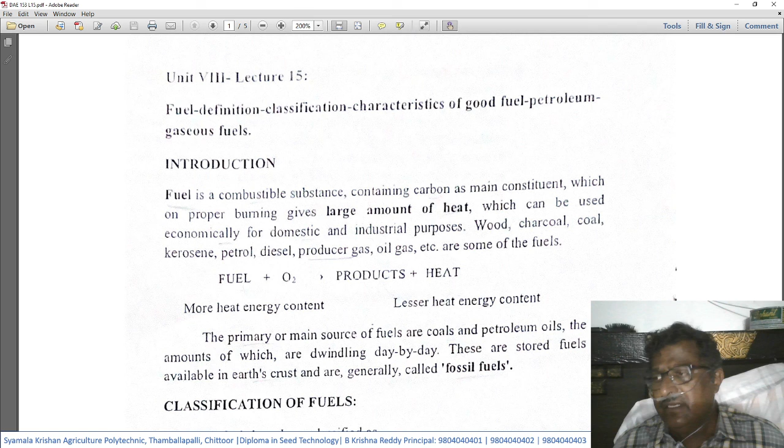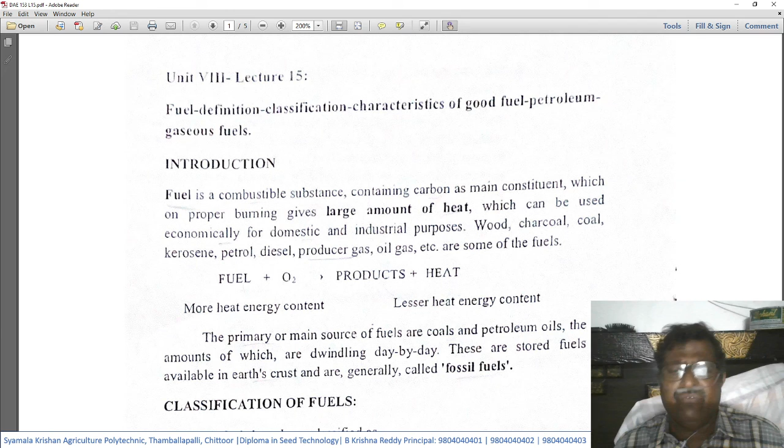These are called fossil fuels. Why? Because the plant or animal dead bodies which are buried deep in the earth's surface thousands of years back, subjected to very high pressure and temperatures, become fossilized, and out of that, because of the anaerobic reactions that happened underneath the earth, they got converted into fuels, either coal or petroleum products. So that is why these are called fossil fuels.

Classification of fuels: The fossil fuels have been classified as natural or primary fuels which are found in nature, such as wood, peat, coal, petroleum, natural gas, etc. In the natural or primary fuels which are found in nature, there is wood. This is everybody's knowledge—the wood which we get from trees after drying will be used as fuel wood. So wood is also a type of fuel.

Then peat. Peat is a low quality coal-like material which is brown in color and available in certain parts of our country, especially in the northeast states, in the form of bogs or peatlands, where it will be excavated. It is something like earth material which is brown in color. It will be dried and used as fuel. These lands from where this peat is collected are called peatlands or peat bogs.

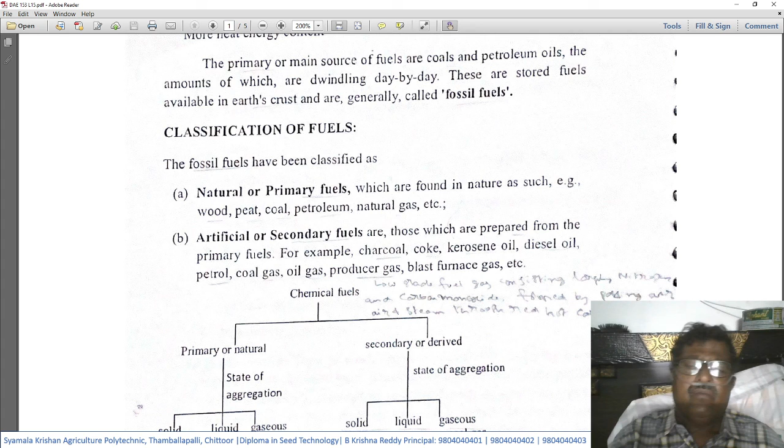Then the classification of various fuels is given in chart form. Students need to go through it and study it well. First, fuels. Out of fuels, chemical based fuels can be called chemical fuels. In that, primary or natural fuels, and secondary or derived fuels, which can also be called artificial fuels. Let's see the different types of aggregations.

Under primary or natural fuels, solid forms: examples are wood, peat, lignite, coal, and dung. These are the solid forms of natural fuels. Then liquid form, it is crude oil. Gaseous form, natural gases.

Then secondary or derived or artificial fuels are also in three forms: solid, liquid, or gaseous. Examples of solid forms are coke, charcoal, petroleum coal, and briquette. Liquid forms are kerosene, diesel, petrol, synthetic gasoline, and LPG, that is liquid petroleum gas. Gaseous forms are coal gas, water gas.

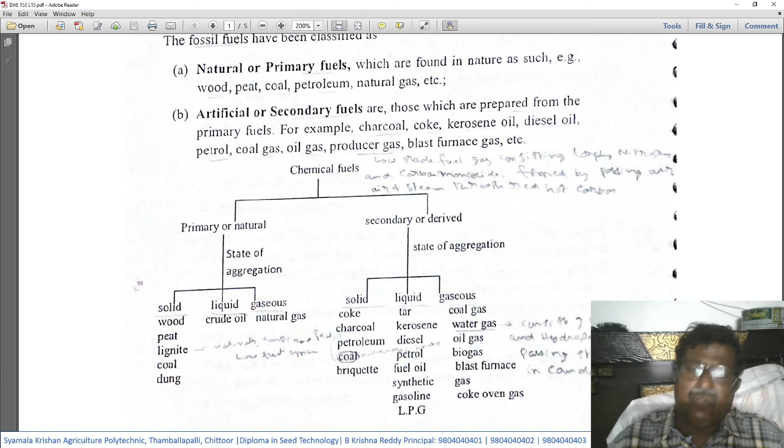Then calorific value. Calorific value of a fuel is the total quantity of heat liberated when a unit mass or volume of the fuel is burned completely. Calorific value means it is the quantity of heat that is liberated when a unit mass or volume of a fuel is burned completely.

Unit of heat, that is calorie, is the amount of heat required to raise the temperature of 1 gram of water through 1 degree centigrade.

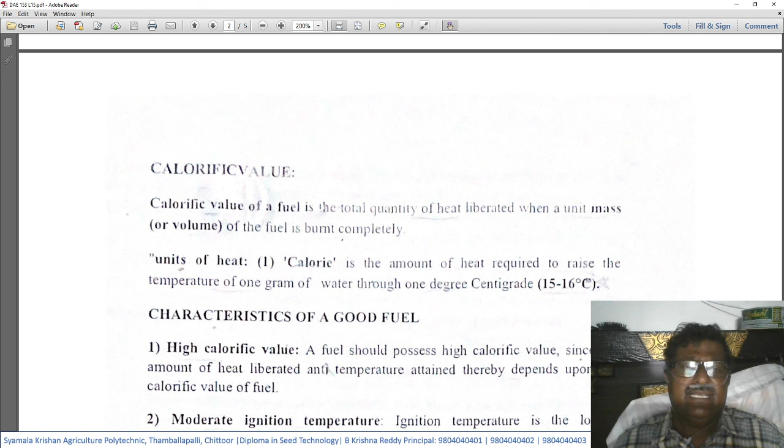So it is important to note down and remember what is the calorific value of a fuel, and what is the definition of a calorie also.

Then characteristics of a good fuel. So to be a good quality fuel, what are the basic characters that need to be present in that fuel?

Number one is high calorific value. A fuel should possess high calorific value since the amount of heat liberated and the temperature attained thereby depends upon the calorific value of the fuel. That means unless the given fuel has high calorific value, we will not get the required high temperatures or liberate a higher amount of heat when a given quantity of the fuel is burned. So naturally it is desirable to have a fuel with higher calorific value than a low calorific value. If the calorific value is less, then to get a given quantity of heat or to raise to a certain temperature, we need to burn more quantity of such fuel material. So if it has high calorific value, for the same heat or temperature, we need to burn only less quantity. So the desirable character here is that the fuel should have high calorific value.

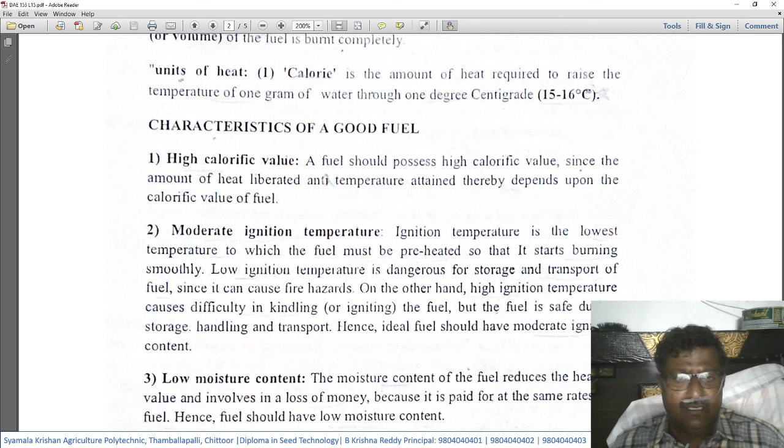Then the second desirable character is moderate ignition temperature.

So what is ignition temperature? It is the lowest temperature to which the fuel must be preheated so that it starts burning smoothly. It is something like an ignition point, the low temperature at which the fuel starts igniting.

Low ignition temperature is dangerous for storage and transportation of the fuel since it can cause fire hazards. If the fuel has a low ignition point, say 20 or 25 degrees, when such fuels are stored or transported, there is a chance they get subjected to such temperatures which automatically ignites the fuel and may lead to fire accidents. So a good quality fuel should not have low ignition temperature.

On the other hand, if such fuels have high ignition temperature, what does it mean? To just start ignition or burning, we need very high temperatures, which is once again a disadvantage because to ignite or burn the fuel we need to use a lot of temperature and heat, which is once again a loss.

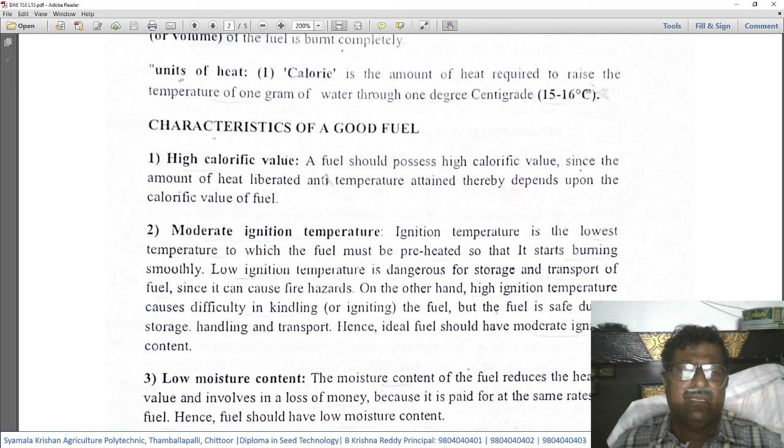So the ideal fuel is one which has neither too low nor too high ignition temperature. Therefore, it should have a moderate ignition temperature.

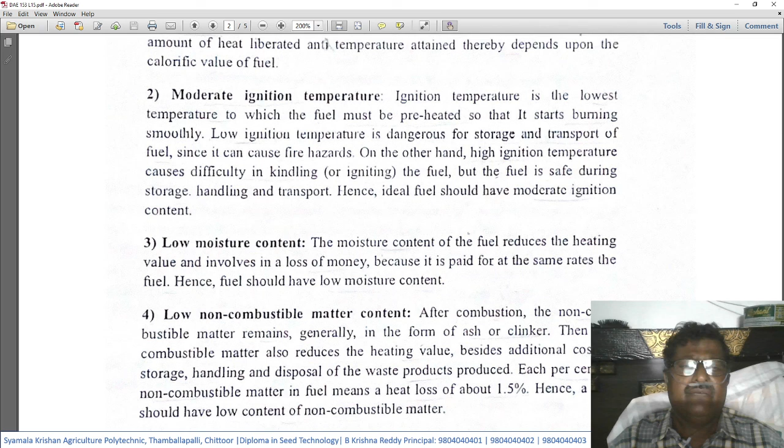Then coming to the third desirable property of any fuel: low moisture content. The moisture content of the fuel reduces the heating value and involves a loss of money because it is paid for at the same rate as the fuel. Hence, the fuel should have a low moisture content.

Imagine a fuel having high moisture. Since a fuel is purchased either on weight basis or volume basis, when moisture is present in the fuel, it naturally adds to the weight, which means we are purchasing the moisture also at the rate of the fuel, which is financially not a good proposal. In other words, even to lose that moisture, a lot of heat is needed, which is once again a loss. So as far as possible, the fuel should have low moisture content.

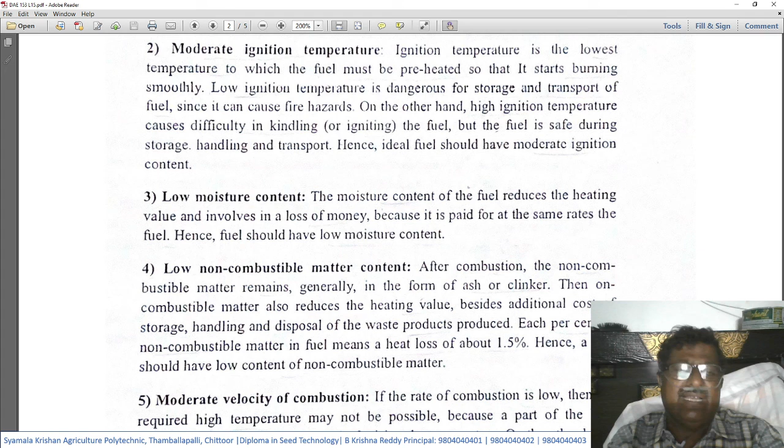Then the fourth property: low non-combustible matter content. Like water content, there may be other components in the fuel that are non-combustible in nature. If such non-combustible materials are present, one needs to waste a lot of heat to eliminate them, in addition to purchasing these unwanted materials at the cost of the fuel.

Then, moderate velocity of combustion. If the rate of combustion is low, the required high temperatures may not be possible because part of the heat liberated may get radiated instead of raising the temperature. On the other hand, too high combustion rates are also not required. What is combustion velocity?

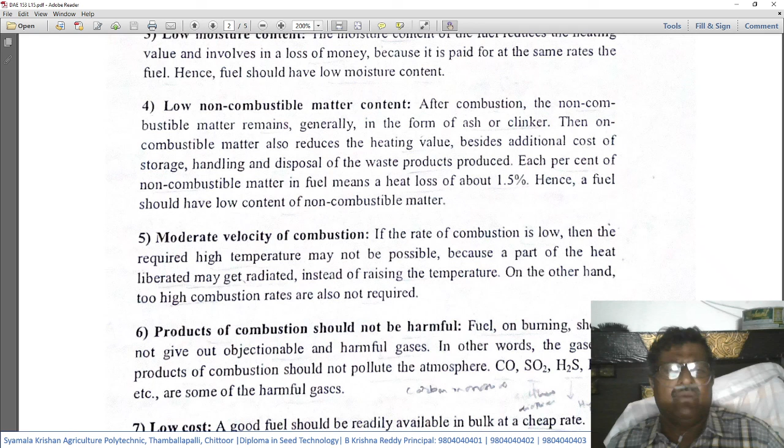Combustion velocity is the speed with which the fuel completely burns out and releases maximum possible heat. If it is very low, the required high temperatures cannot be achieved by combusting such materials. Otherwise, if the velocity of combustion is too high, we get the heat or temperature over a very short period, which may not be desirable for the required purposes in industries. So a good fuel should have moderate velocity of combustion.

Then the sixth property: products of combustion should not be harmful. After burning the fuel, there would be some substances left over. Fuel on burning should not give out objectionable or harmful gases or substances. In other words, the gaseous products of combustion should not pollute the atmosphere.

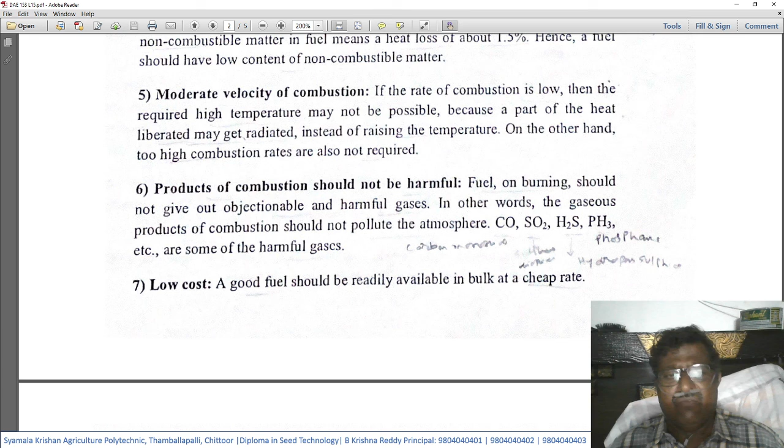As we know, whenever fuel materials are burned in the atmosphere, certain gases like carbon dioxide, carbon monoxide, sulfur dioxide, hydrogen sulfide, and phosphine are produced. Out of these, carbon monoxide, sulfur dioxide, hydrogen sulfide, and phosphine are very harmful for animals and men. So, as far as possible, the given fuel should not produce this type of harmful gases when combusted or burned.

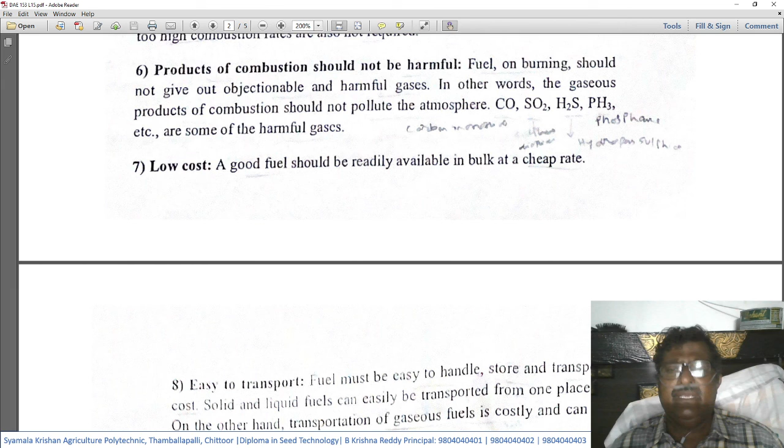Then, low cost. A good fuel should be readily available in bulk at a cheap rate. It's common sense: nobody wants to purchase fuel at a higher cost since it may not be viable for domestic or industrial purposes. So an ideal fuel should be cheap and at the same time available in abundance. If it is cheap but not available, there will be no use. So cost-wise it should be low and availability should also be there.

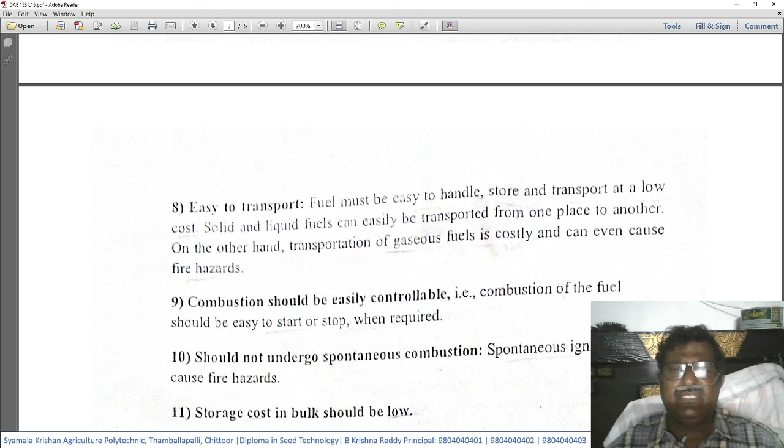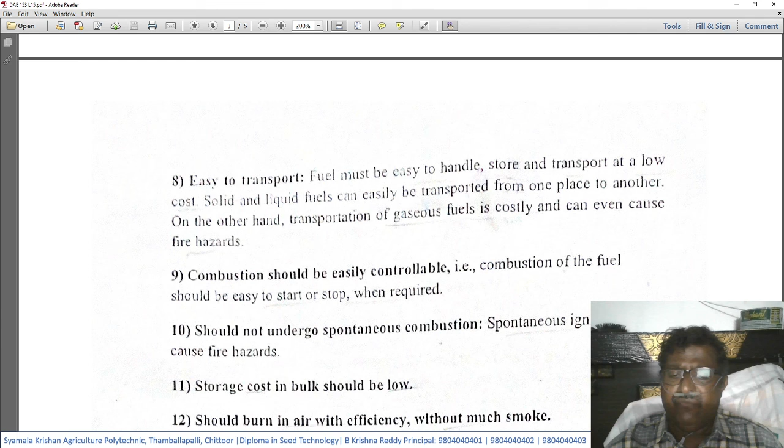Eighth point, easy to transport. Fuel must be easy to handle, store and transport at a low cost. Solid and liquid fuels can easily be transported from one place to another. On the other hand, transportation of gaseous fuel is costly and can even cause fire hazards.

Combustion should be easily controllable. That is, combustion of the fuel should be easy to start or stop when required. We should have control over the combustion of the fuel. Whenever we want to start, we must be in a position to start the burning process, or when it needs to be stopped, we must be able to stop it. That type of fuel should be used.

Next, tenth point, should not undergo spontaneous combustion. Spontaneous ignition can cause fire hazard. So the fuel that needs to be used should not undergo spontaneous combustion. That is, it should not automatically catch fire. Only when we need to combust or burn it should it start burning. It itself should not start burning.

Eleventh point, storage cost in bulk should be low. That is, storage should be low. This is from the economic point of view.

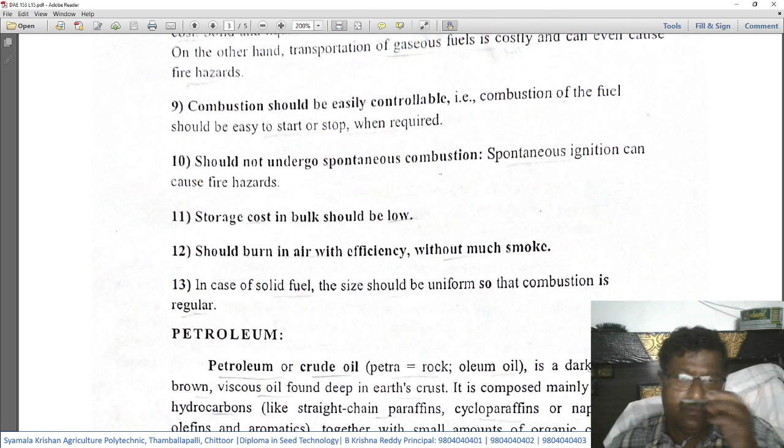Twelfth point, should burn in air with efficiency without much smoke. An ideal fuel is one which should burn efficiently and without producing much smoke, because if it produces more smoke, it results in pollution.

Thirteenth and last point, in case of solid fuels, the size should be uniform so that combustion is regular. The size of the units of fuel, say coal, coke, peat, or even wood, should be uniform so that while burning you get uniform combustion or heat. If it is of various sizes, then it is difficult to get uniform combustion.

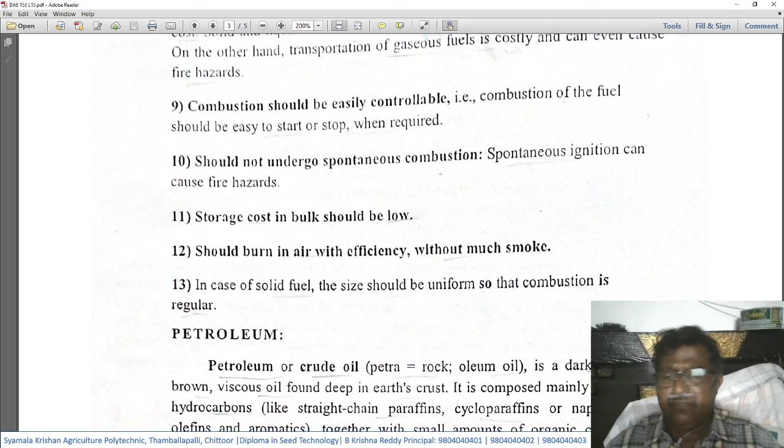So then we will see what is petroleum. Petroleum or crude oil, otherwise known as crude oil. Here petro means rock, oleum means oil. That means it is produced from a hard rocky substance beneath the earth's surface. It is dark greenish brown in color, a viscous oil found deep in the earth's crust.

That means it originated in the deeper layers of the earth's crust. As we already told, it is originated from fossil rocks. Fossils are the plant and animal materials which were buried deep in the earth some millions of years ago. When they are subjected to high pressures and high temperatures, they become fossil rocks or fossils. From that, this crude oil or petroleum is extracted.

It is composed mainly of various hydrocarbons. This type of crude oil contains a lot of hydrocarbons like straight chain paraffins, cycloparaffins or naphthalenes, olefins, and aromatics. These are the various substances present in various proportions in the petroleum, together with small amounts of organic compounds containing oxygen, nitrogen and sulfur.

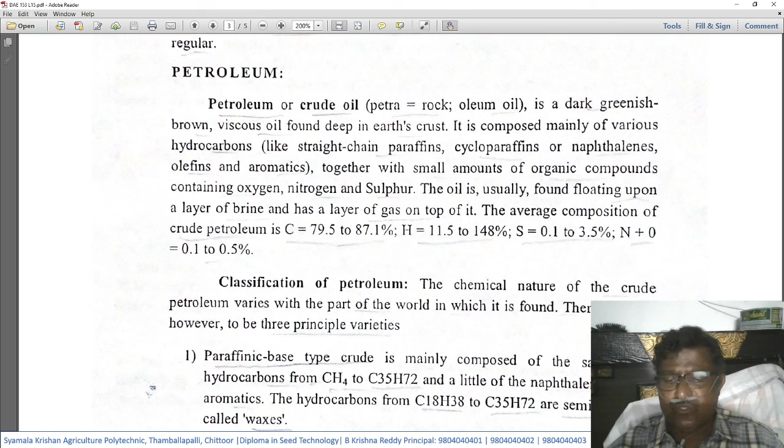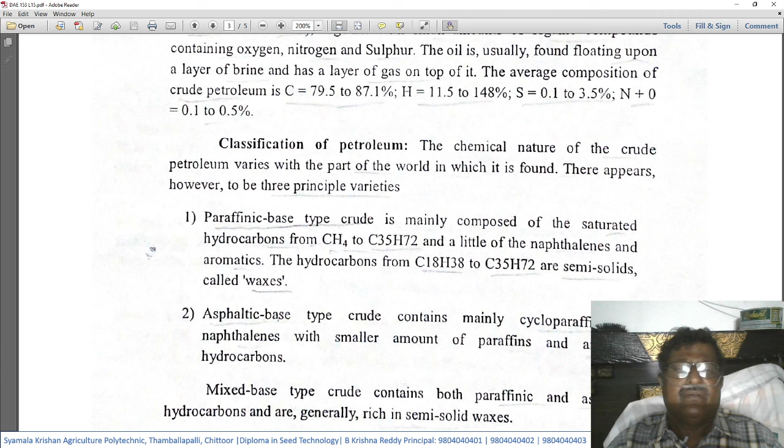Then, classification of petroleum. The chemical nature of crude petroleum varies with the part of the world in which it is found. There appear, however, to be three principal varieties. So this petroleum and its components vary from place to place. There are three principal varieties of petroleum.

One is paraffin-based type. Crude is mainly composed of saturated hydrocarbons from CH4 to C35 H72. These are the chemical formulas for the substances present in the crude oil, meaning in the given petroleum, one atom of carbon and four atoms of hydrogen up to C35 H72. This is the range of substances present here, with a little of the naphthalenes and aromatics. The hydrocarbons from C18 H38 to C35 H72 are semi-solids, and when the hydrocarbons have this type of formula, they are called waxes.

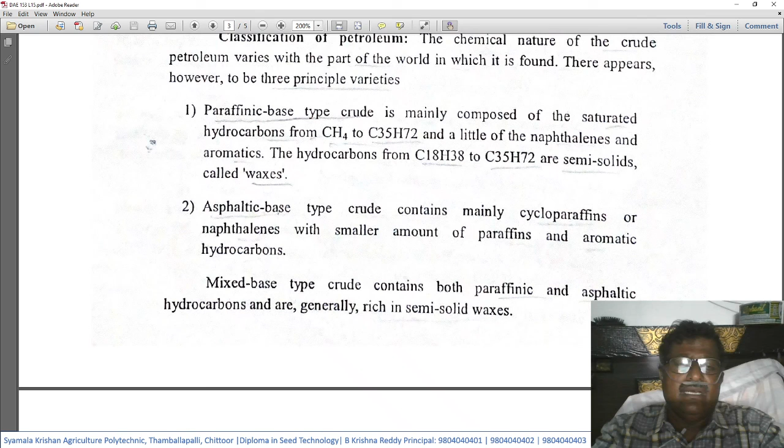Asphaltic base type crude contains mainly cycloparaffins or naphthalenes with a smaller amount of paraffins and aromatic hydrocarbons. Mixed base type crude contains both paraffinic and asphaltic hydrocarbons and is generally rich in semi-solid waxes.

According to modern theory, petroleum has resulted from the partial decomposition of marine animal and vegetable organisms of prehistoric forests. As we already discussed, the plant parts and animal parts got decomposed after getting buried deep in the earth at deeper layers.

These were present in the prehistoric forest - various vegetative matters, plants, and various types of marine and land animals. When they are buried deep in the deeper layers of the earth and are subjected to anaerobic reactions under great pressure and temperatures, they got converted into fossil fuels. Out of them, only these petroleum products are originated.

Changes in the earth like volcanoes etc. buried these materials underground where they have been subjected to intense pressure and heat during the ages of time. This is what we explained up to now.

The conversion of these materials into various hydrocarbons has been going on either under the influence of radioactive substances like uranium, or by bacterial decomposition under anaerobic and strongly reducing conditions and temperatures under high pressures. I think everything here we have discussed.

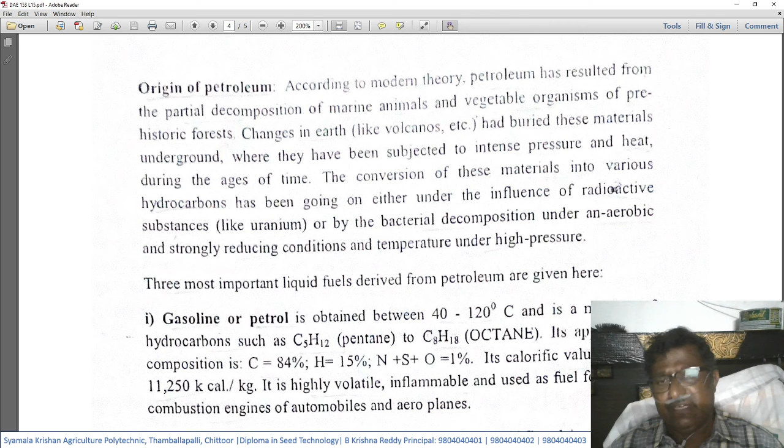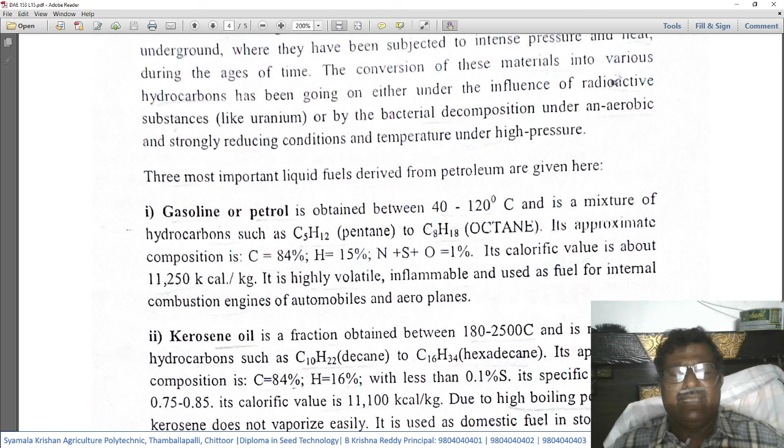Out of this petroleum raw material, three types of petroleum products are derived. Number one, gasoline or petrol. From the petroleum, either gasoline or petrol is obtained between 40 to 120 degrees centigrade.

When the petroleum raw material is refined, subjecting it to various degrees of temperature, that is something like a fractional distillation, various fractions of the petroleum raw material will get separated and they will get collected and named differently, and used for different purposes.

In the refinery or distillation process, petrol or gasoline is the product which we can obtain between 40 to 120 degrees centigrade, and is a mixture of hydrocarbons such as C5H12, that is pentane, to C8H18, that is octane. So this petrol or gasoline is a mixture of various hydrocarbons, starting from pentane C5H12 to octane C8H18.

Its approximate composition: this petrol or gasoline contains 84% carbon, 15% hydrogen, and nitrogen, sulfur and oxygen all put together around 1%. These are the approximate values.

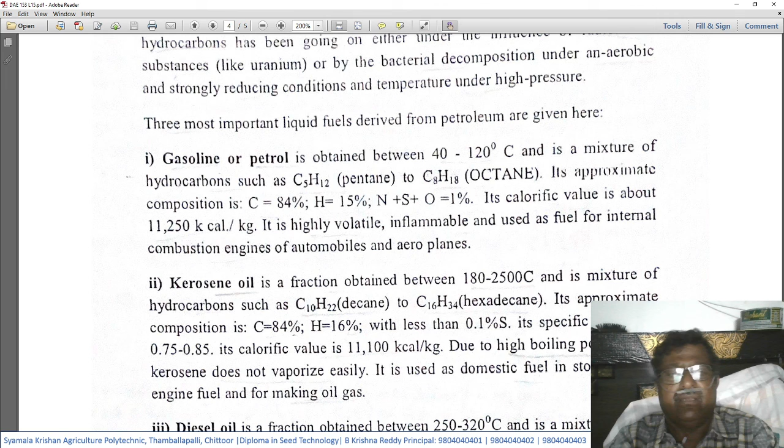So the so-called gasoline is used in aeroplanes as a fuel. The petrol is used as a fuel in automobile industries, especially for automobiles where internal combustion engines are there. This petrol is used as a fuel.

Then comes the second one, kerosene oil. It is a fraction obtained between 180 to 250 degrees centigrade. We told you that petroleum oil is subjected to various degrees centigrade while refining it.

At this temperature, that is 180 to 250 degrees, we will get the mixture of hydrocarbons such as C10H22, that is decane, to C16H34, hexadecane. This is known as kerosene.

Its approximate composition is carbon 84%, like your petrol, hydrogen 16%, with less than 0.1% sulfur. Its specific gravity is 0.75 to 0.85, and its calorific value is 11,100 kilocalories.

Due to a high boiling point range, kerosene does not vaporize easily. In comparison with petrol, the significant difference is that petrol, due to its low boiling point, gets easily vaporized - we can see petrol vapors in the petrol pumps during summer season. Whereas kerosene has a high boiling point and therefore we cannot find vaporization so easily.

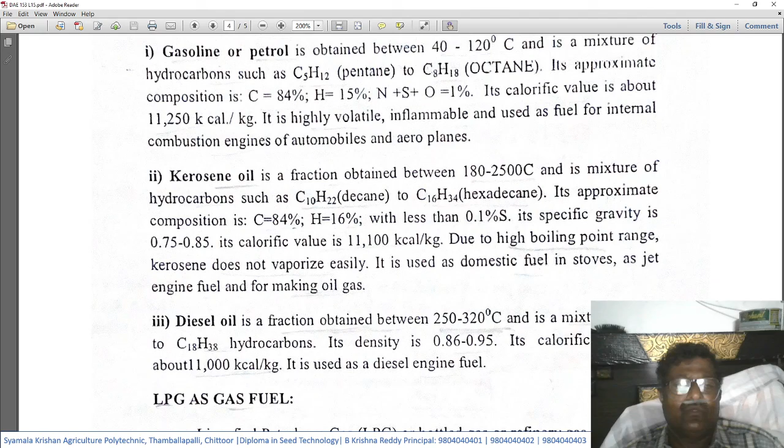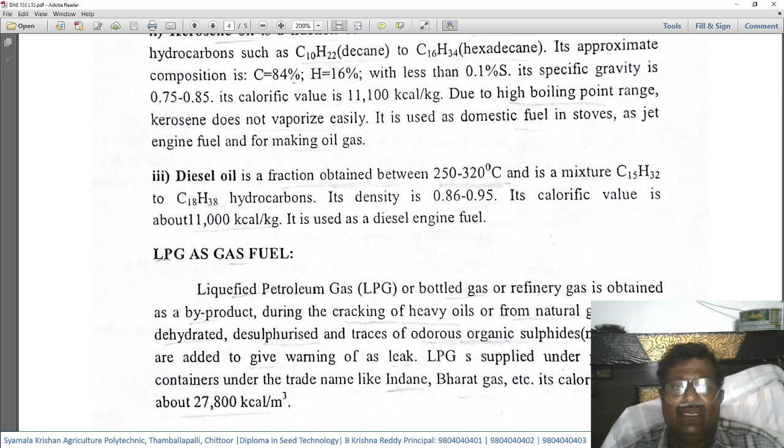Diesel oil is a fraction obtained between 250 to 320 degrees centigrade, and it is a mixture of C15H32 to C18H38 hydrocarbons. Its density is 0.86 to 0.95, and its calorific value is 11,000 kilocalories per kg. It is used as a diesel engine fuel.

Then LPG as a gas fuel. LPG means liquefied petroleum gas, also known as bottled gas or refinery gas. It is obtained as a byproduct during the cracking of heavy oils or from natural gases, when natural gas or heavy oils are subjected to the cracking process.

LPG is dehydrated, meaning water or moisture present is removed, and desulfurized, meaning sulfur is also removed. Traces of odorous organic sulfides called mercaptans are added artificially to give warning of a leak, since LPG is originally smell-less. When these odorous substances are added, it acquires a pungent smell, so when LPG is leaking, we can identify it because of this smell.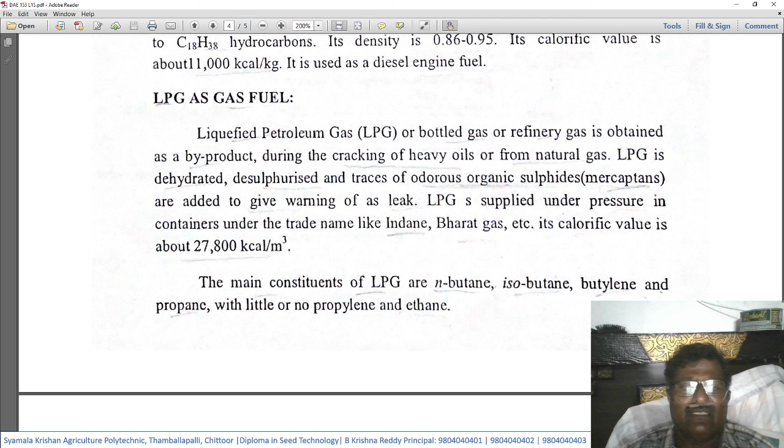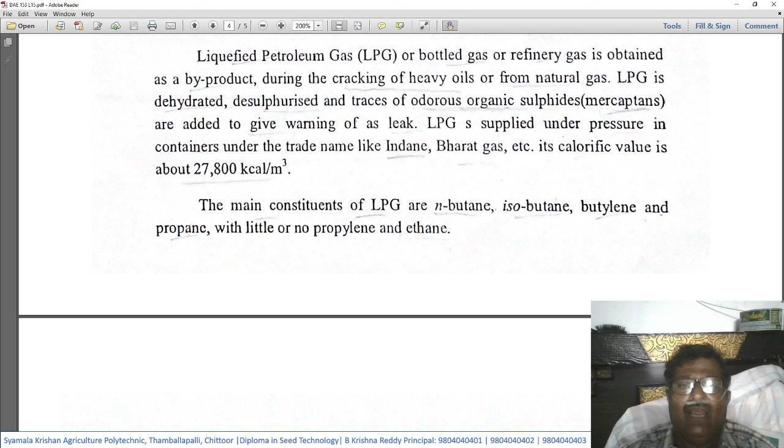LPG is supplied under pressure in containers under trade names like Indane, Bharat gas, etc. Its calorific value is 27,800 kilocalories, a very high calorific value, and these are mostly used for domestic purposes. The main constituents of LPG are N-butane, isobutane, butylene, propane, with little or no propylene and ethane.

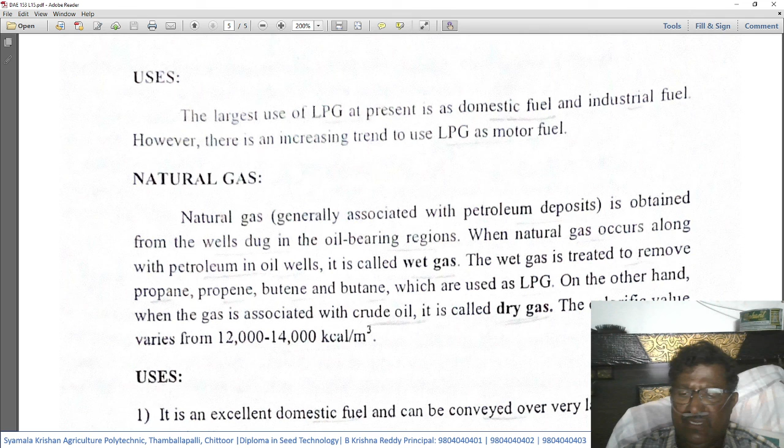The largest use of LPG at present is as domestic fuel, mainly for cooking purposes. It is also used as an industrial fuel. However, there is an increasing trend to use LPG as a motor fuel also. Nowadays, in automobile industries, people are converting petrol or diesel engines into LPG running engines, so this usage as a motor fuel is also picking up, in addition to domestic and industrial usage.

Then natural gas. Natural gas is generally associated with petroleum deposits; wherever petroleum deposits are there, natural gas is also available. It is obtained from wells dug in the oil bearing region. When natural gas occurs along with petroleum in oil wells, it is called wet gas. The wet gas is treated to remove propane, propene, butane, and butene, which are used as LPG.

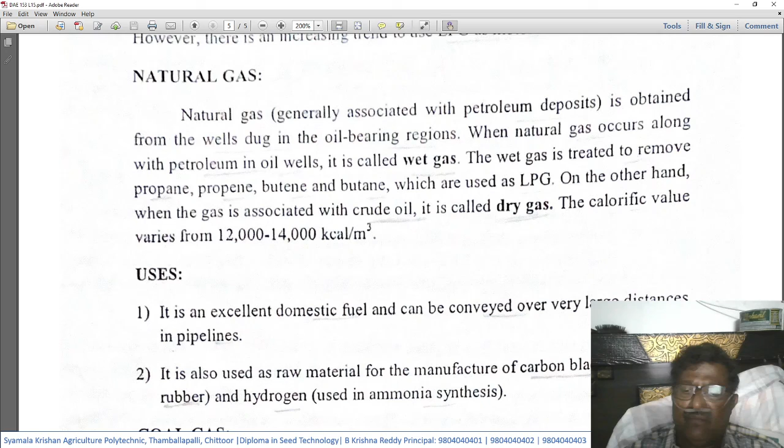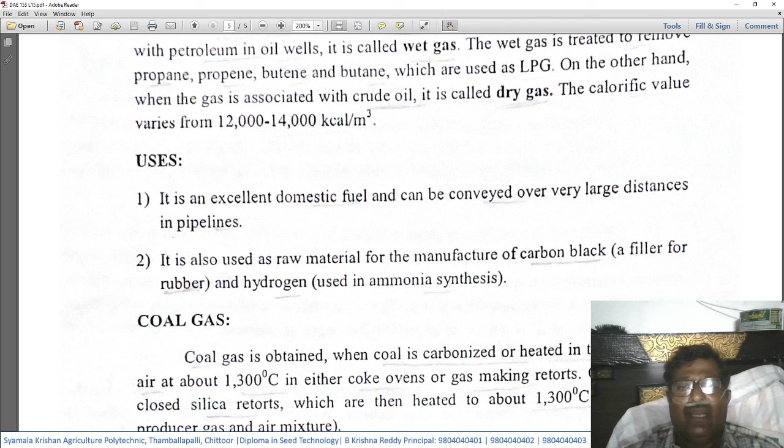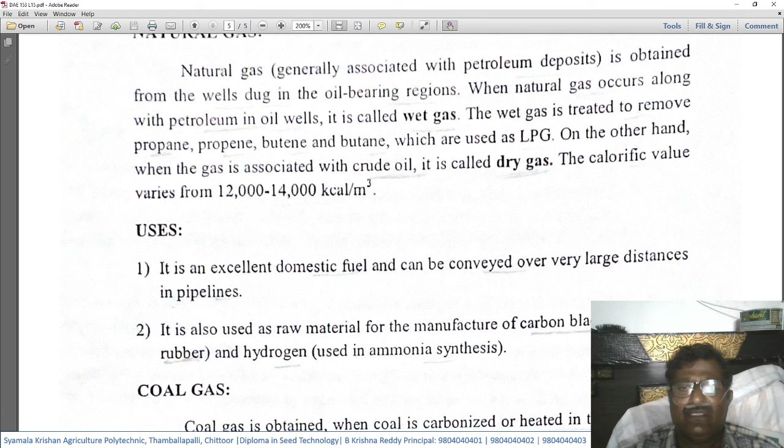On the other hand, when the gas is associated with crude oil, it is called dry gas. The calorific value is 12,000 to 14,000 kilocalories per meter cube. It is an excellent domestic fuel and can be conveyed over very large distances in pipes.

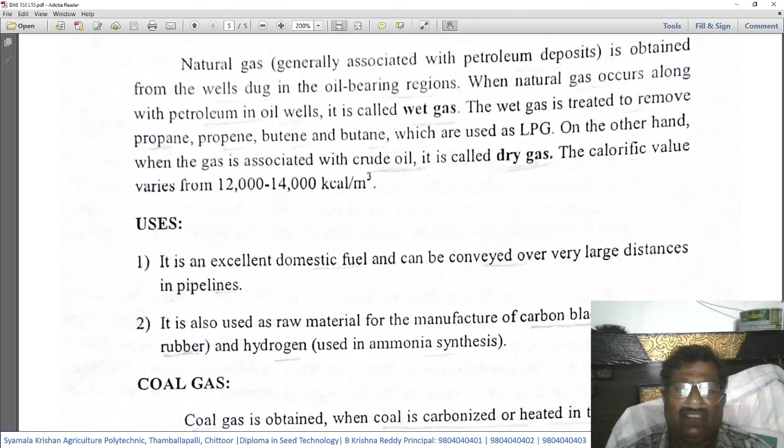Natural gas is also used as a raw material for manufacturing carbon black, a filler for rubber, and for producing hydrogen used in ammonia synthesis. This ammonia in turn is used for various industrial purposes, including manufacturing agricultural fertilizers.

Then coal gas. Coal gas is obtained when coal is carbonized or heated in the absence of air at about 1300 degrees centigrade in either a coke oven or gas making retorts. It is a gas obtained by burning coal anaerobically, that is, in the absence of air, at a very high temperature of 1300 degrees centigrade.

This coal gets carbonized, and what we get is coal gas. Coal is fed in closed silica retorts, which are then heated by burning producer gas and air mixture. Even by burning producer gas, we will get coal gas.

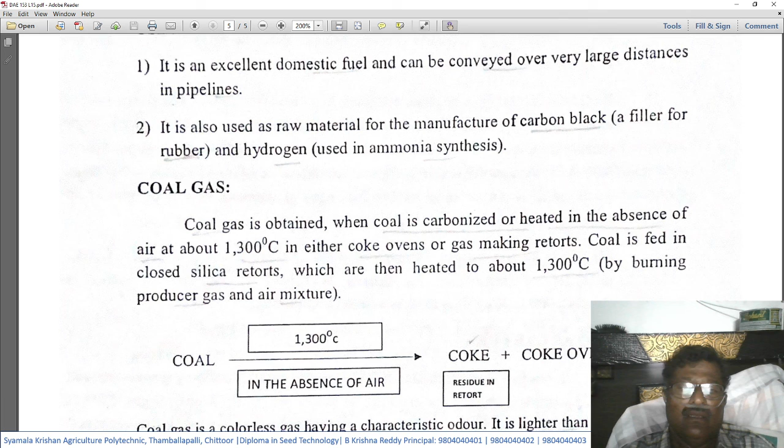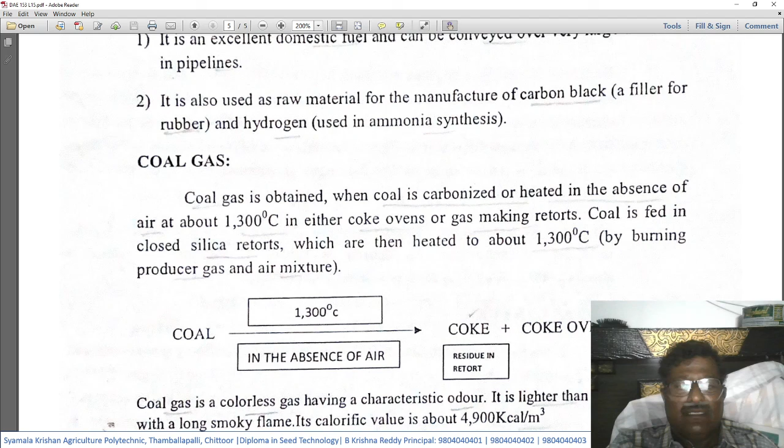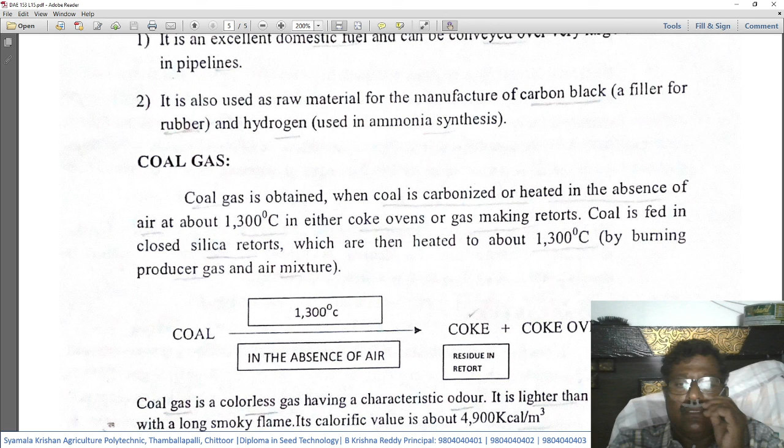So the simple equation here is: coal is subjected to 1300 degrees centigrade temperature in the absence of air, that is anaerobic conditions, and what you get is coke plus coke oven gas. The residue in the retorts is coke.

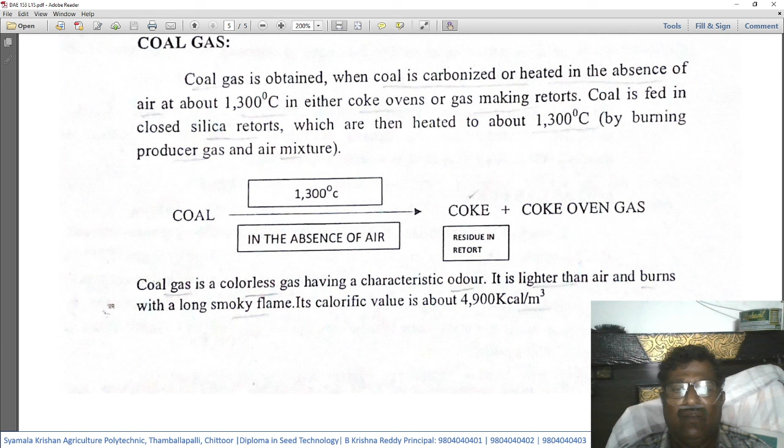Coal gas is a colorless gas having a characteristic odor. It is lighter than air and burns with a long smoky flame. Its calorific value is 4,900 kilocalories per meter cube, which means coal gas has less calorific value compared to the others.